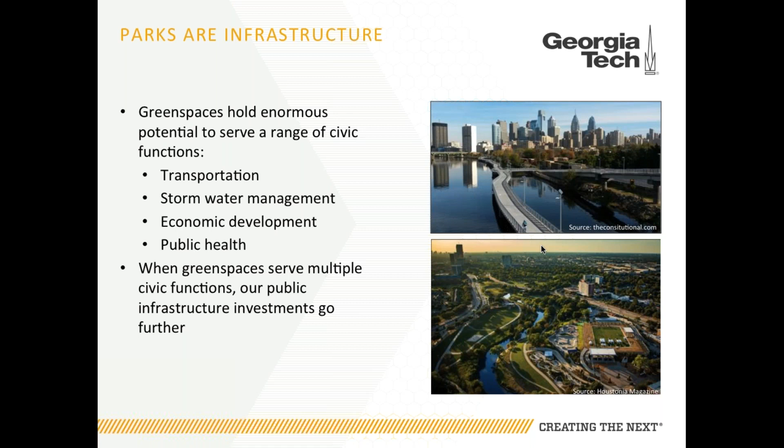Today, we're looking at parks as infrastructure and the importance they play in vital areas including transportation, stormwater management, economic development, and public health. Through a strong collaboration of universities in multiple cities, local partners, the City Parks Alliance, Speedwell Foundation, and a whole host of folks in Washington, we've been able to put together a very strong backlog and a database that helps decision makers make good decisions and strongly consider parks when they think about urban infrastructure.

Green spaces serve multiple functions, and what we've been able to show is that the combined impacts of these effects produce an economic benefit that can range from 2 to 7. That's pretty significant in terms of economic development and creating jobs for the communities affected by the parks and these systems.

With that, I'm going to turn to Carrie, and she's going to discuss some of the problems that we see in urban areas as they relate to New Orleans and Atlanta.

Great, thanks, Kevin. Can you hear me okay? Yes. Oh, good, great.

As this slide talks about, some of the key problems that, as we all know, are happening in many cities across the U.S., but has been a very large problem in areas such as Houston, as we saw recently. Expanding urban areas are leading to lots of impervious surfaces, and this makes it difficult for the natural water flows to drain.

As that's disrupted by urban sprawl patterns and all of these impervious surfaces, stormwater that's traditionally been redirected into streams, lakes, and rivers is going into storm drains instead, and when we have extreme flooding situations, it just can't handle it. Similarly, though, we actually have a big problem with traffic in many of these cities.

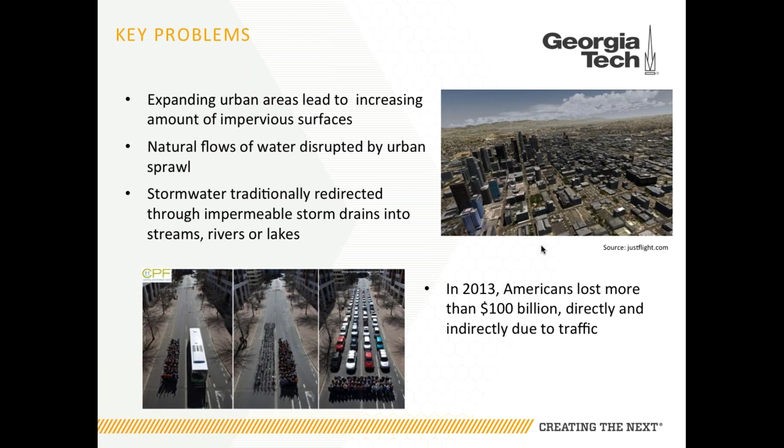What we're looking to do is explore how parks are actually overcoming those problems.

The idea with what we're looking at is that parks can utilize natural systems in order to process stormwater, and at the same time serve as multi-use transportation corridors. We can deal with surface runoff, discharge, and pollutant concentrations in that stormwater, and also create mobility corridors for a more active transportation network that uses less space per person, while also helping in the areas of health and creating active lifestyles.

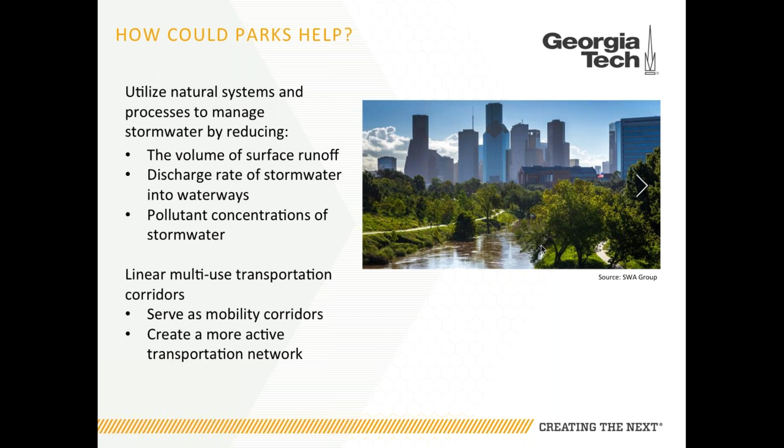So what we're doing at Georgia Tech, we looked at a number of parks across the nation, and we chose 12 -- 3 in each of the 4 primary areas we're looking at: transportation, stormwater, economic development, and health.

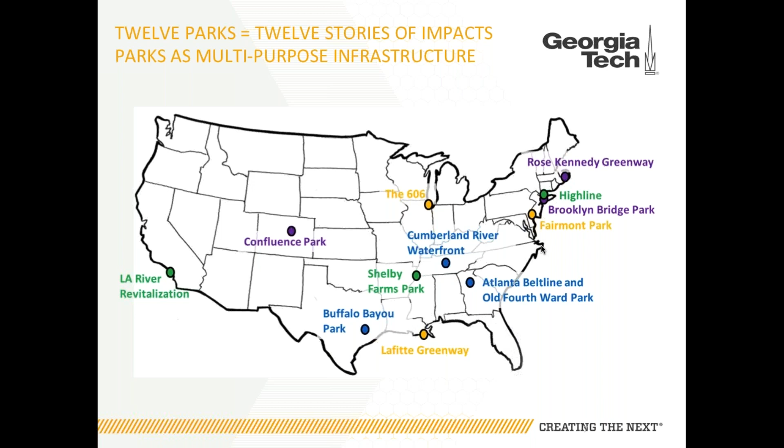Today we only have time to go into 2 of those projects, but you can look forward to more information about all of them in the months to come.

To drill right down into the 2 we want to talk about today, the first is the Lafitte Greenway in New Orleans. This was a park created after Katrina. There were funds available through the Disaster Community Development Block Grants, paired with Recreational Trails Grants funding, and they created a 2.6-mile trail connecting the French Quarter with some neighborhoods outside of that, where a lot of the employees of the French Quarter live. The trail opened in 2015, and the whole park and trail cost only $9.1 million.

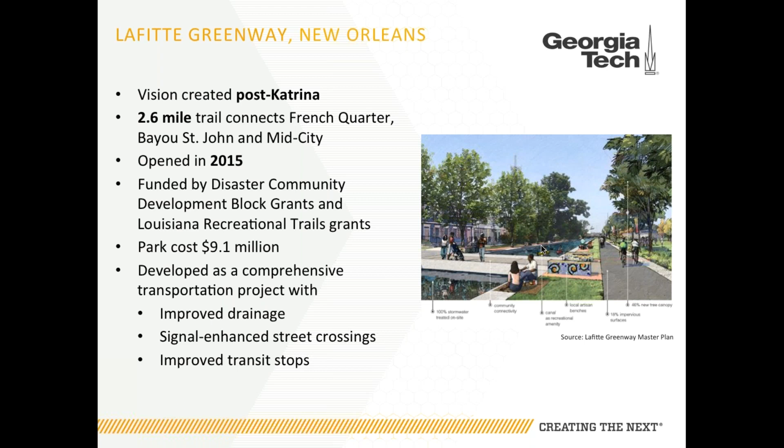The whole project was developed in order to improve drainage in the area and enhance some of the street crossings. There was also an entire transit plan where they improved transit services in the area, creating better bus stops and places within the park where people could be active, all built around a trail.

So in the first year that it was open in 2016, the result of this trail was that it served more than 272,000 trips. Through our work, we went out on the trail to assess whether it was being used primarily recreationally or for transportation purposes. It turned out that 80% of people cycling on the trail on a weekday were doing so for transportation. So this trail isn't just having health benefits, it's become part of the transportation network, helping people get from their neighborhoods into the center of New Orleans. Because of projects like this and the focus on trails post-Katrina, New Orleans has seen an increase of more than 260% in bike commuting.

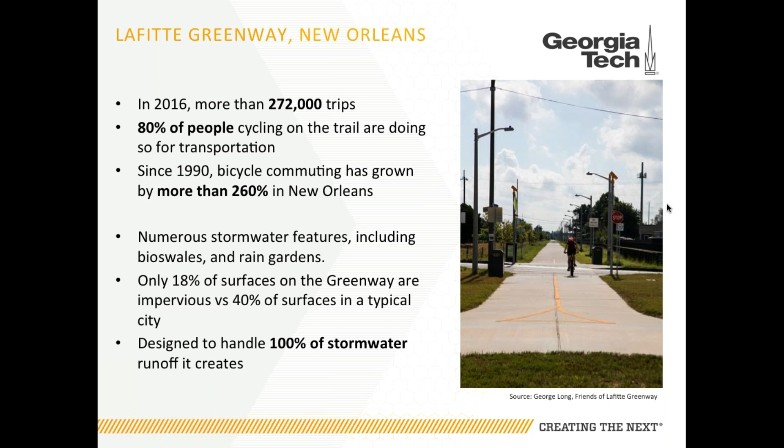In addition to that, the park has numerous stormwater features. It's a beautiful park with 100% of the stormwater runoff that it creates being handled within the park itself, not having to rely on other locations.

So moving to our second case study city, the historic Fourth Ward Park in Atlanta. This was opened in 2011. It's a 17-acre park, funded by Tiger funds as well as private development and city funds. It's a gorgeous park with a skate park, activity fields, and theaters, and it connects to the Atlanta Beltline, a 22-mile corridor looping around the entire city of Atlanta when fully constructed about 10 years from now. This park connects directly to the first section of the Beltline that's already been open for a few years, providing this alternative transportation corridor in addition to the stormwater features of the park.

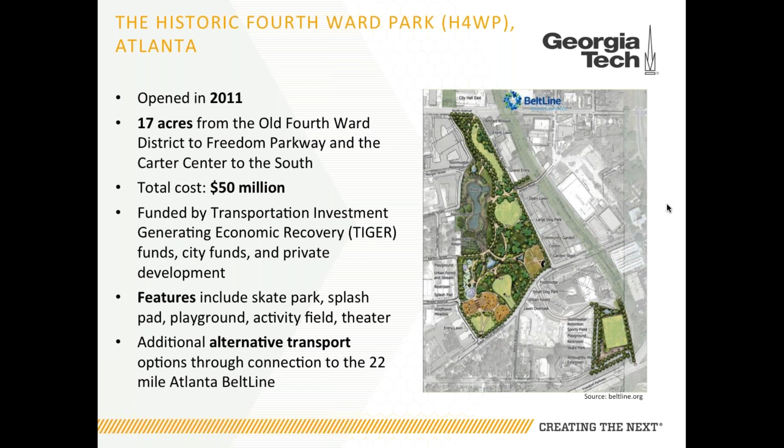This one was a little more pricey than New Orleans, constructed for a total cost of $50 million. The impacts of historic Fourth Ward Park and the Beltline are immense, though. In the design of this park, what they had originally intended to do was create traditional stormwater pipes, the underground networks we're all used to. When they instead decided to create the park, they actually saved $16 million of the cost it would have taken to create that pipe network.

This park is designed to collect stormwater from 800 acres in the area, called the Clear Creek Watershed, and it can hold a stormwater event up to a 500-year flood. It's actually very beautifully done that you can see the mark on the walls of where the 500-year flood is.

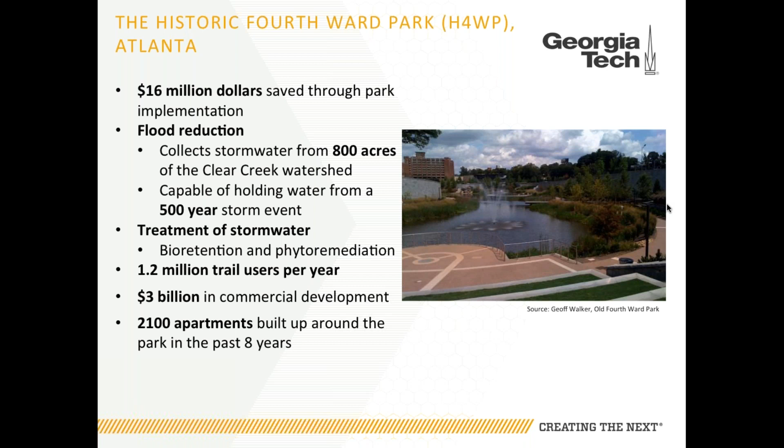In addition to this, the connection to the Beltline, that trail serves 1.2 million trail users per year. Because of the beauty of this park and the accessibility the trail has brought, we've seen $3 billion in commercial development in the area, 2,100 apartments, and it's literally Crane City as you bike along the corridor with so much development occurring with folks who want to be close to the trail and this type of park.

So the lessons to be learned from all of this, through parks as infrastructure, is a new way to think about the critical infrastructure we're constructing. Let's not think of parks as just parks, and let's not build infrastructure that only serves one purpose. If we're going to deal with these 21st century storms, we have to bring our infrastructure up to speed. We need to think through new ways of transportation for local residents that catalyze development, and how we can use those spaces for stormwater purposes. What's unique about these two parks is they used unique funding sources we have to look to more often in creating these types of spaces.

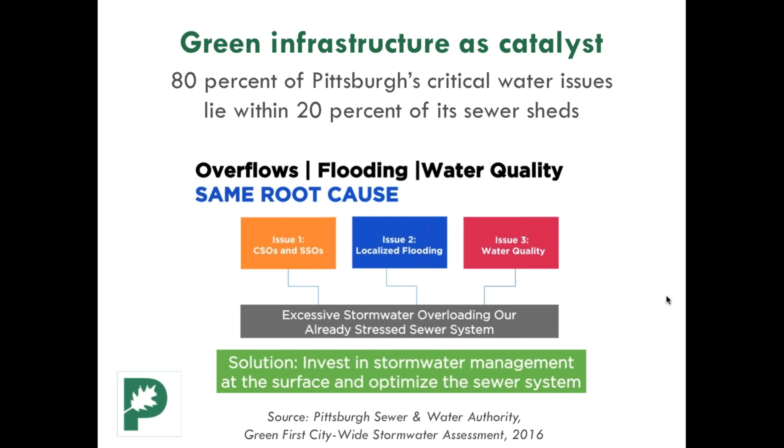This slide shows that the shift has actually gone so far in the political thinking that now the Pittsburgh Water and Sewer Authority, which released its Green First citywide stormwater assessment - its plan for how it wants to meet these mandates - late last year, has identified that 80% of our critical water issues are lying within 20% of our sewer sheds. These same issues that are causing the combined sewer overflows are also leading to localized flooding, water quality problems at the more local level, and are overloading the system. So investing in green infrastructure is going to allow us to solve a lot of problems at once.

Here on this slide, we see that Pittsburgh has taken the parks and overlaid them with those priority sewer sheds that I was describing, and it's pretty easy to see that there's a lot of overlap there. In the light blue areas, these are the top 7 most critical sewer sheds where cleanups and strategies need to be implemented. The lavender areas are the next 20 down.

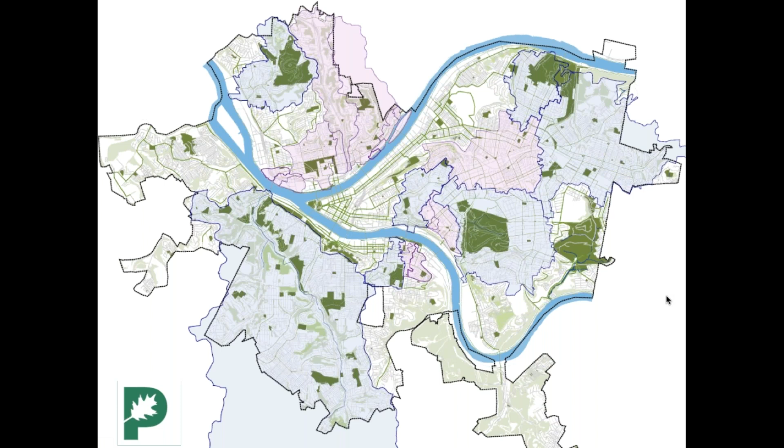Within those areas, we have been actively working over the past 4 and 5 years to create both master plans as well as more detailed designs for stormwater management that link community priorities for their parks and neighborhoods to the kinds of metrics and controls that our sewer and water authorities need to meet their water quality standards.

We see this as the opportunity for us to direct funding and maintenance into some of these smaller community and neighborhood parks where there have been no resources before, and to give us opportunities to maintain those assets over time, since the mandates will require that our agencies keep these systems in good working order.

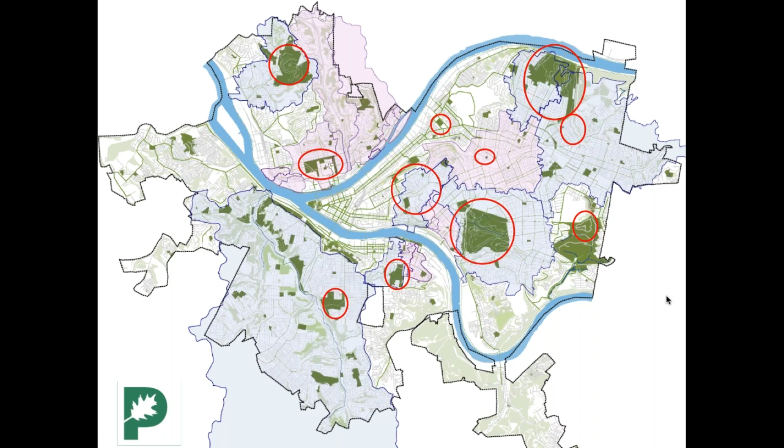So I'm going to dive in quickly to two case studies. One is the 4 Mile Run area, which is a sewer shed level strategy.

Just to give you some context, this is within Pittsburgh's Schenley Park, one of the 5 regional parks I described, over several hundred acres in size.

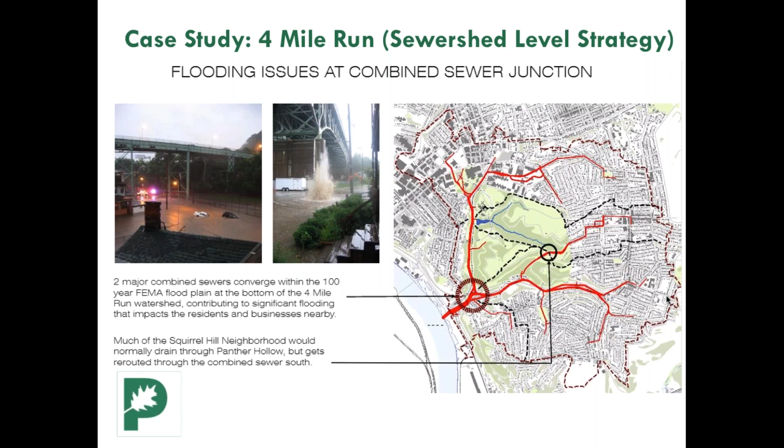We've been working in Schenley Park for more than 15 years, and before we ever had the sense of the context we were working in, we had identified a number of critical objectives, both from a connectivity perspective as well as from an ecological restoration perspective.

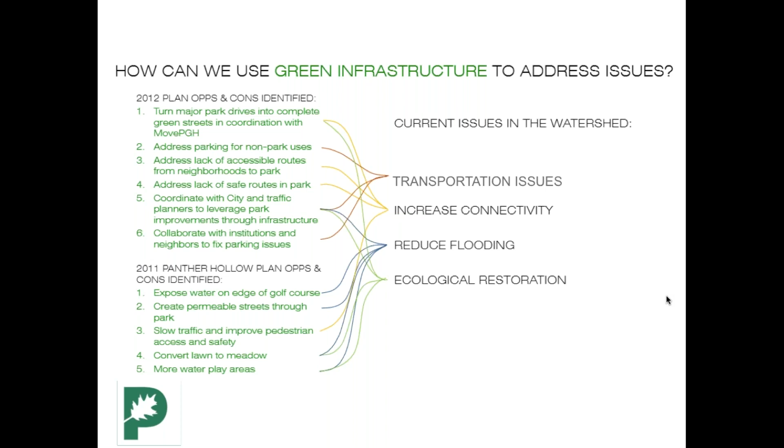When we began to see how we could work at a scale that went beyond the park itself and into the neighborhoods, we saw that green infrastructure could be an avenue for solving those regional problems I described, as well as the park issues we needed to address.

The plan we are in the preliminary phase of at this point would allow for the redirection of stormwater from the surrounding densely populated neighborhoods and university districts into the park itself, using an existing lake, as well as recreating a stream channel in the valley, outlined in blue, all the way down to the Monongahela River at the bottom left of your screen.

This would completely separate a significant amount of the stormwater going into the combined system from that system altogether. We're estimating at least 120 million gallons of water annually will come out of the system, equating to about 32 million gallons in reduction annually of a combined sewer overflow at the discharge point.

This work also includes mobility corridors, as we'll be reclaiming this underutilized section of the park within the stream valley, allowing people to move between the neighborhoods, through the park, and into the system more efficiently. The project is estimated to cost about $25 million and will have enormous collateral benefits, including flood reduction, recreational value, and increased property values in the region.